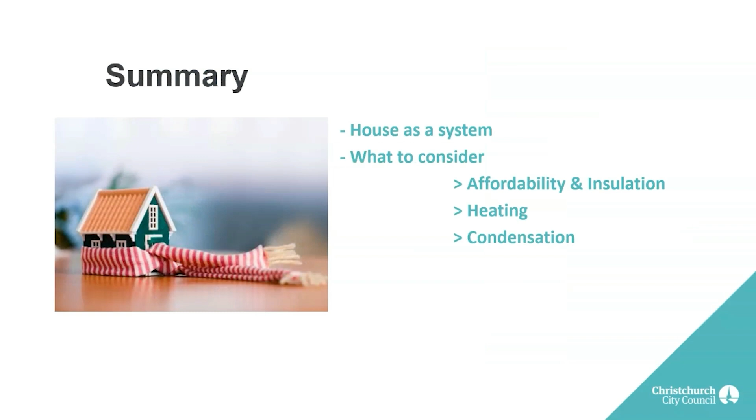Good afternoon, good evening, everyone. Tonight we're going to talk about: cold homes are not a curse, they are by design. People are cold in their homes, and quite often putting a jersey on is just not quite enough. So how are we going to tackle this? We're going to talk about the house as a system, what to consider, affordability, insulation, heating, condensation. We'll have a bit of a practice exercise, and then we'll talk about the future.

All right, still pushing this a little bit. Here we go. Okay, so first of all,

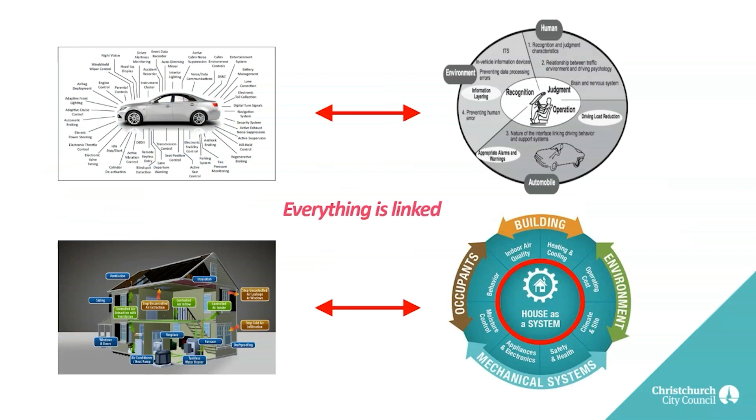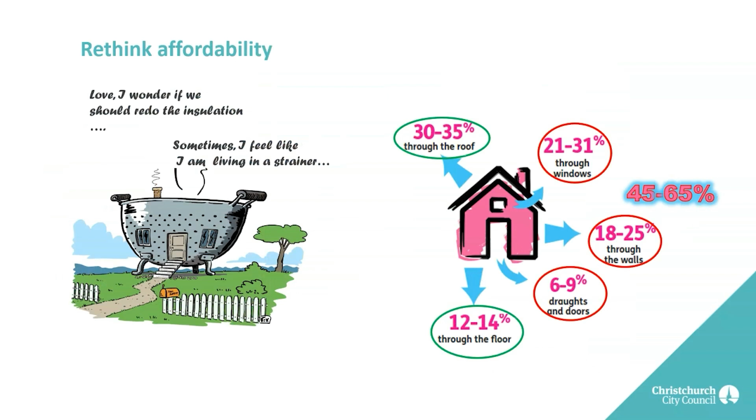In New Zealand, we're really good at insulating the roof and floor because it's easy, but we're pretty crap at dealing with the rest. Simple glazing, no insulation in the walls, and very drafty houses are typical here, and they could be responsible for up to 45-65% of your heat losses. So my question to you tonight is: can you actually afford to lose so much heat?

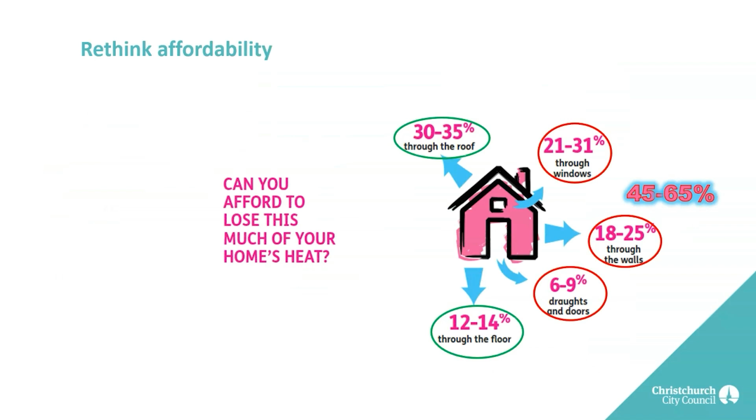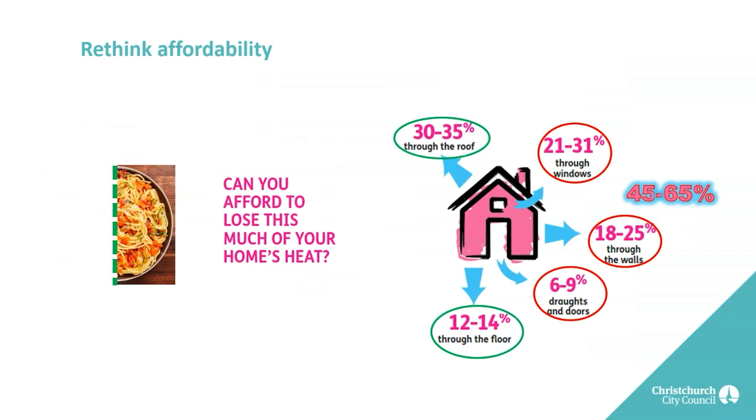So, two examples here to emphasize it. If you cook dinner tonight for your whole family, and before starting dinner you take half of the meal and put it in the bin - is this affordable? Because this is what you do with heating, right? Got it? The second one is even funnier - well, to me.

Imagine it's winter and you just go out with a beanie and some socks, and that's it. You forget about the rest in the middle, right? I'm sure it's going to be freezing, it's going to be chilling. So do not apply to your house what you will not apply to your own body.

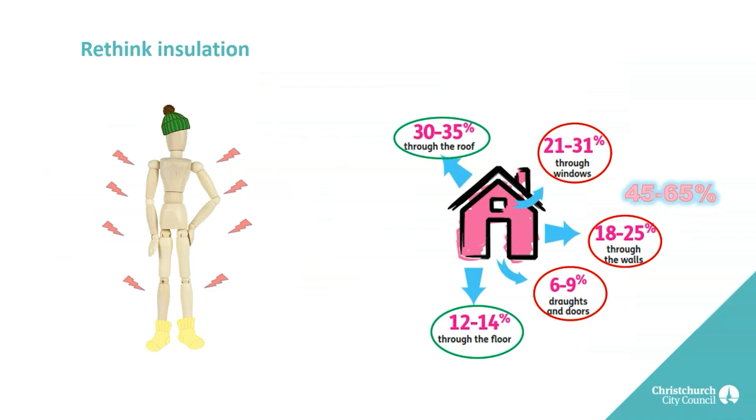So you need clothes, right? So you need a good insulation layer for the whole house. Now, we need clothes to keep the energy in. Very important. So one more thing.

I know you're going to not like it, but insulation by itself won't keep you warm, right? Highly controversial, but this is the truth. So if you buy clothes and don't wear them, like my jacket on the seat there, it's not producing the heat, it's not retaining any heat. So you need to have a source of heating to be able to retain some heat, right? So that's how you stay warm.

So if you've got a bedroom with insulation and no source of heat, well hello, there's nothing to retain. The bedroom is gonna stay cold, right? No source of heat, nothing to retain. So very important to keep that in mind.

Okay, heating basic principles. Just a couple of information about the thermodynamics that apply to buildings. So the first law is about energy, and it says energy is conserved and it could be converted. So energy can't be created and it can't be destroyed, right? So very important. So you can save money, but you can't save energy.

That's bullshit, that's crap, sorry, excuse my French. That's not happening with the law.

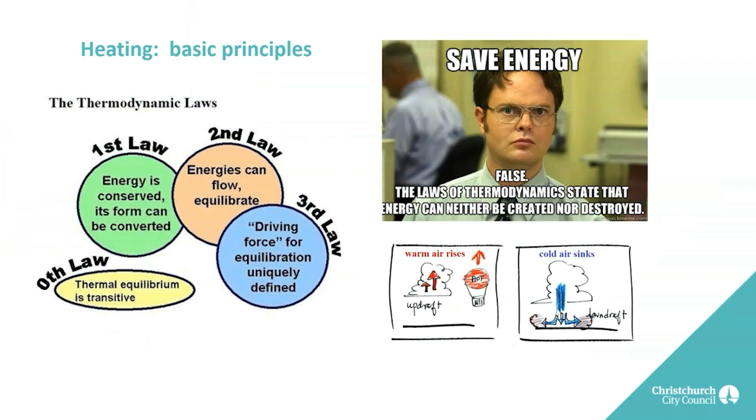The second law of thermodynamics says energy can flow. So heat rises, cold air goes down, and it can also equilibrate. So it always goes one way, always from hot to cold. So if you have someone coming to you and saying, close that window, you let the cold in, that's just not how physics works, man. The heat goes out, that's it. You feel the heat leaving your skin, you feel cold, but this is what it is. The cold never comes in.

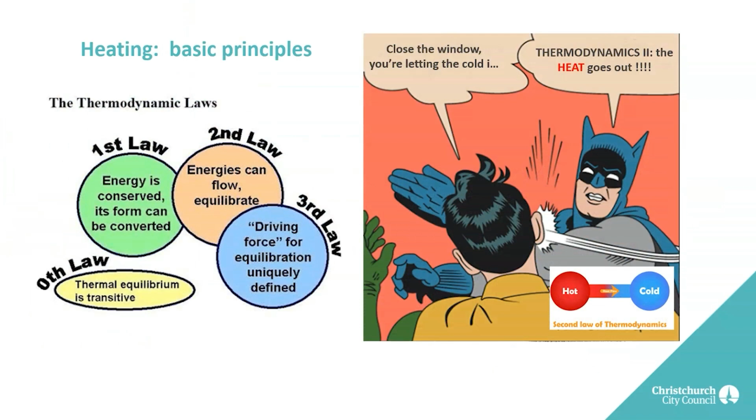Now we have clarified that. Heating - okay, a typical mistake is to start the thinking with product. Just wrong, don't start this way. So when people come to me at the council and they've got a new design and they're like, ooh, I've got a new house, I want underfloor heating.

And I'm like, cool, okay, do you understand you're going to have a concrete floor then? And they're like, yeah, I also want carpet everywhere, especially in the lounge. And I'm like, well, it's not going to work, man. You're putting insulation on top of your heating system. You're going to go against what you want to achieve.

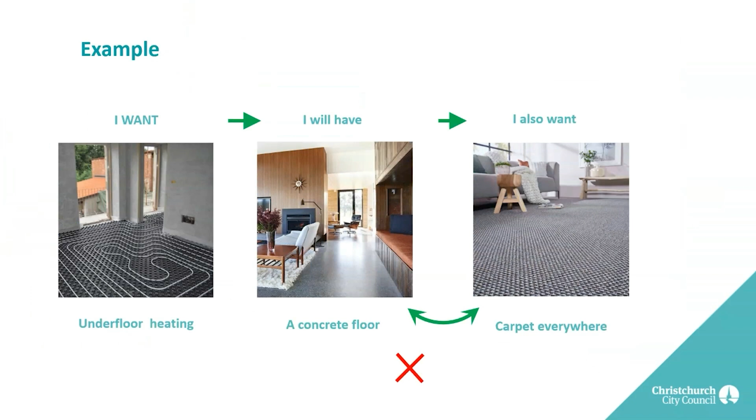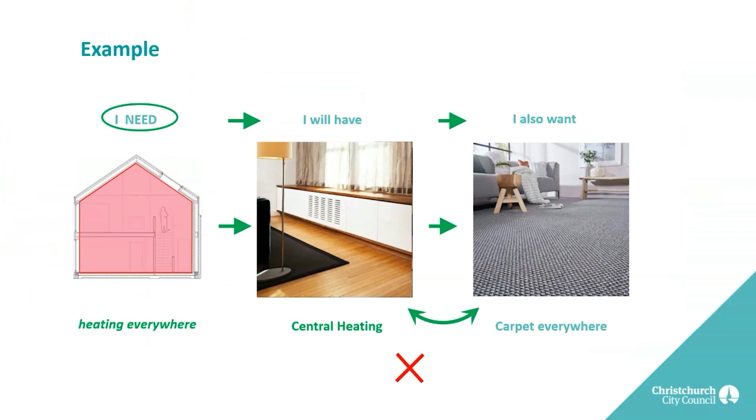So maybe what you're saying is, I want heating everywhere. Heating everywhere? Here you go. And what you're actually looking for is central heating. And here you can have carpet, and this is working, right? So it's very important to understand everything is linked.

So how do we choose the best heating system? It's a 4-step process. The first one is, how does your house retain the heat? The second one is, what type of heat do you prefer? The third one is, how do you want to interact with your heating system? And then you can choose what type of heater is the most adequate for your house.

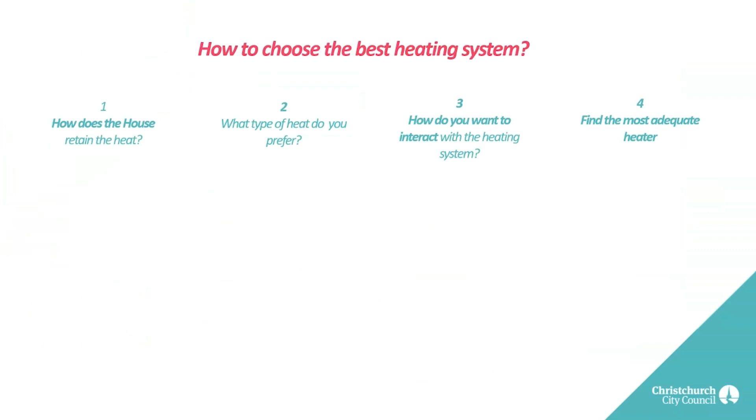So tonight, when you go home, I want you to think about, how does my house retain the heat? There's only 2 answers: thermal mass and air tightness. So either your house is a beautiful old villa and you've got a lot of thermal mass - solid timber wall, solid timber floor, solid panel, concrete, bricks, solid plaster - that's thermal mass, that holds heat. The other option is you've got a more modern house and it's kind of airtight. So that's your way of retaining the heat.

Okay, that's pretty much it. What type of heat do you prefer? Well, there's 2: radiation and convection. So radiation, you heat the surfaces, and it works really well with thermal mass houses.

You've got convection, where you're heating the air, and it works really well with airtight houses. So here you've got a couple of heating solutions. Fireplace, for example, that's radiation, so it works with long infrared waves, and it works really well with thermal mass. Heat pumps, that's a convection system.

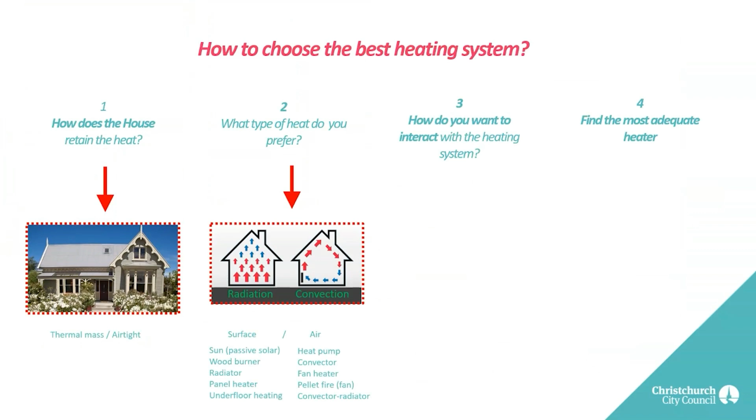How do you want to interact with the system? Two options here. You can be active - you go chop wood, and during the weekend you feed the log burner every 2 hours, you get pretty active there - or you're pretty passive, and it's automatic, you don't have to think about it. End of story. That's pretty much the choice you have.

And then you can choose whatever type of heating works for you, your house, and how you want to interact with it. A couple of examples.

Here's an old villa built in 1905 in Linwood. What we have is large volume, timber windows, very high ceiling. We have thermal mass everywhere - solid timber floor, solid panel wall, timber windows, lath plaster. Here we've got a fireplace that does radiation. It works really well for it. This house has actually had 3 of them.

Now, the problem is in the bedroom, they've got heat pumps. Heat pumps is convection. This house is not airtight at all, so that's a problem. It's not adequate for that type of house.

Option number 2, a modern house built in 2015 in Rolleston. Here, what we have is a very compact house. We've got aluminium windows, and this house is actually pretty airtight, around 3 air exchanges an hour. And we've got a heat pump - works really well. It's heating the air, and the house is airtight.

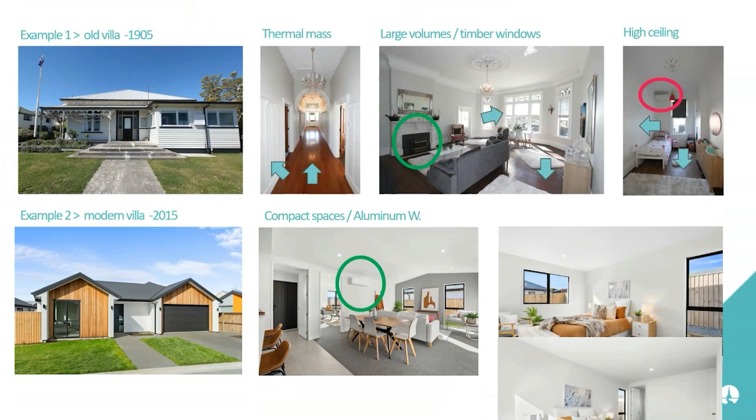Now, here's a picture of the bedroom. There's no heating system in this bedroom, so this is not going to be warm. The insulation is not going to do its job if there is no heating source.

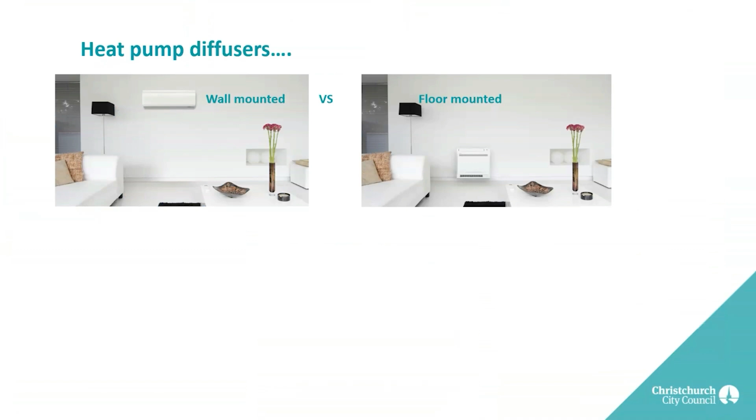So here's a question: heat pump diffusers. There are 2 types - wall-mounted and floor-mounted. You'd think they do the same job, but they don't. A wall-mounted one blows hot air down, and it has to blow really fast to go down, then it rises back up as quick as possible, and you end up with 2 layers - hot air at the top, cold air at the bottom. A floor-mounted one blows hot air at the bottom very slowly, and with natural convection, heat rises, so you heat the whole place slowly but naturally. So one is designed to cool, one is designed to heat.

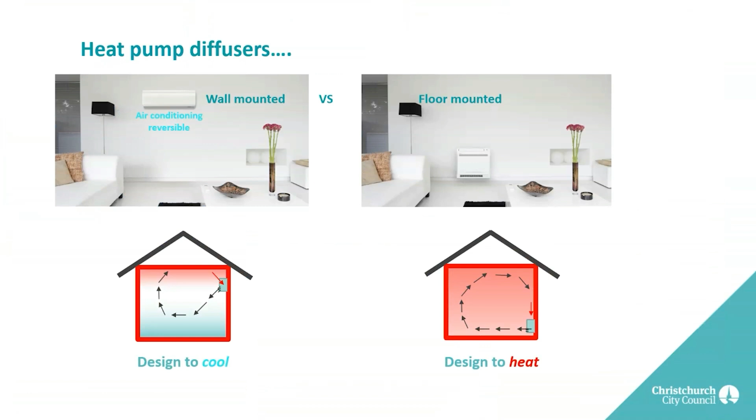So if you've got a wall-mounted unit, you don't have a heat pump, you've got an air conditioning reversible unit. If you don't trust me, look at the spec, you'll see that's what it is - it's not designed to heat, it's first designed to cool. If you've got a floor-mounted one, you're a winner for winter.

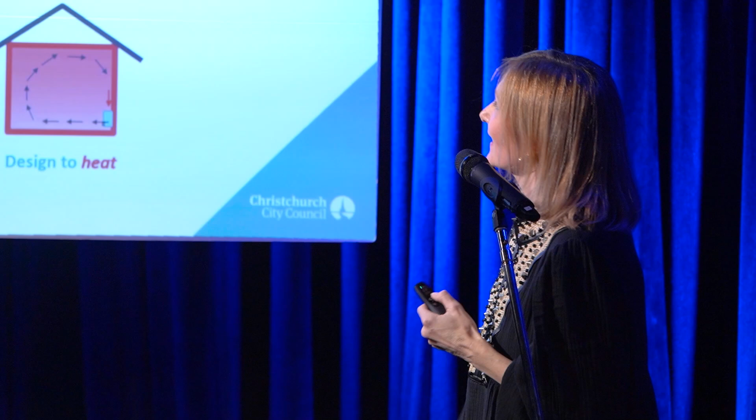Okay, next topic: condensation.

Fun fact - did you know any word in English that finishes by T-I-O-N? That's French, right - la construction, documentation, that's the same, you can name it. There is one exception according to Wikipedia, which is starvation. That's not French - if we don't have food, we still have bread. So that's not from us, that's for sure.

Okay, condensation. It is very hard for me to relate to this because coming from Europe, we don't have that problem - we solved that like 40 years ago. So I had to go back in my memory and think, what is my first memory of condensation? And don't laugh, but this is true - this is my memory of it. You remember at the beginning of the movie, they've got that car being lifted in the Titanic, and then you've got Jack and Rose having fun in the basement. And by the way, that car is actually a French car - this is a true story, thanks to James Cameron. This is a Renault. Very popular at the time, and it was actually in the Titanic.

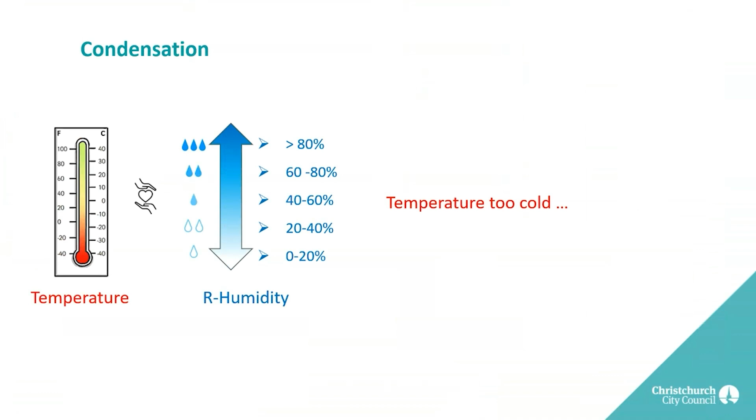So condensation is the relationship between temperature and relative humidity gone wrong. If the temperature is too cold, that's what's happening when you speak outside in winter morning - the air is too cold to hold any moisture, and you see condensation when you speak. And if the humidity is too high, like in the shower, the air will be saturated with moisture and start to condense.

That's a massive problem. Here's a fun fact: 80% of the condensation is human-made in the house. So you are the problem. Well, we are the problem.

We make it, right? A couple per night releases a liter of moisture. If you don't open your windows, after 30 days, that's 30 liters. Of course you're going to have condensation on your windows if you don't open them 3 minutes per day. Drying clothes inside is not magic, guys.

The water doesn't disappear, it just changes form. It becomes vapor in the middle of the night, then it changes form again and becomes liquid, and it gets on your windows. So if you've got condensation in the morning, it's probably related to your clothes from the night before. Watch for what you're doing wrong.

So what we need to do is find the right balance between relative humidity, which we want to lower, and the temperature, which we need to raise a little bit. If you don't know what to do, you can get one of these little devices, a thermometer and hygrometer, which measures temperature and relative humidity. $3 on Trade Me, right?

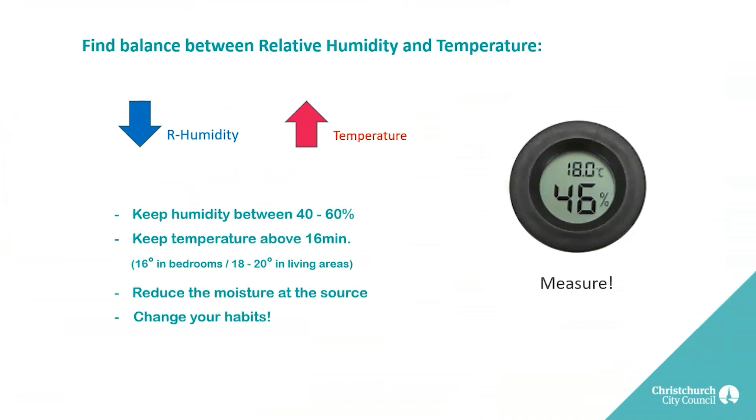Very easy. You want to try to target 40 to 60% relative humidity in your house, temperature above 16, reduce moisture at the source, and have good habits.

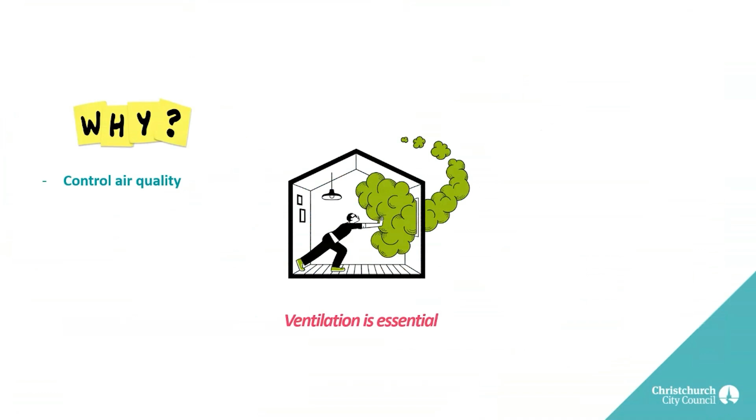Ventilation, I mentioned it, is very important. Why do we need ventilation? Because we want good air quality. We want fresh air for us to breathe. We need to remove the CO2 at night. We need to remove moisture, and we can control overheating.

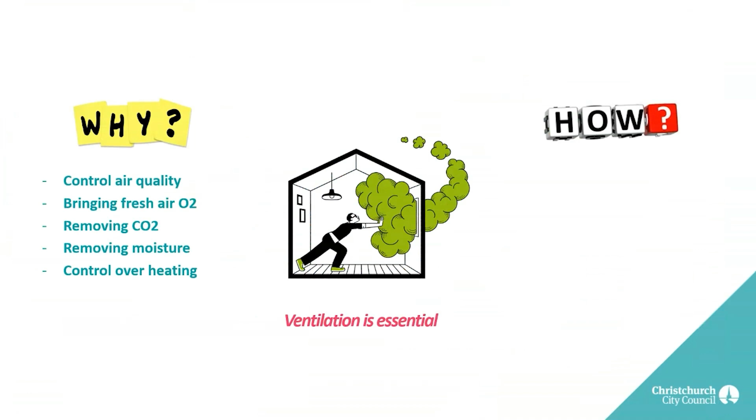How? Well, you can do it naturally by having good habits. Briefly open your windows 3 minutes in the morning. Use the range hood when you're cooking and the extract fan when you're taking a shower. Don't dry clothes inside, or if you do, use a dehumidifier or open a window.

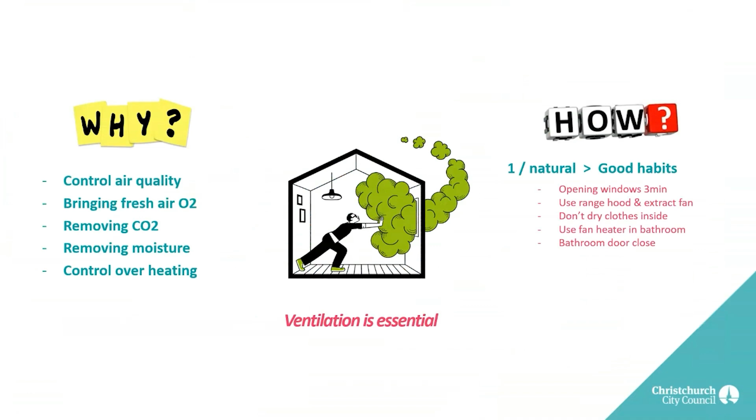Use the fan heater in the bathroom, just to allow the air to hold more moisture before you put the fan on. And keep the bathroom door shut so the extract fan can do its job and the moisture doesn't go into your house. If you don't want to bother with that, you can get a mechanical ventilation system that does it for you - negative pressure, positive pressure, or balanced pressure system.

So it's important to keep the recirculation air off because we don't want to recycle that moisture. We want to get it out, right?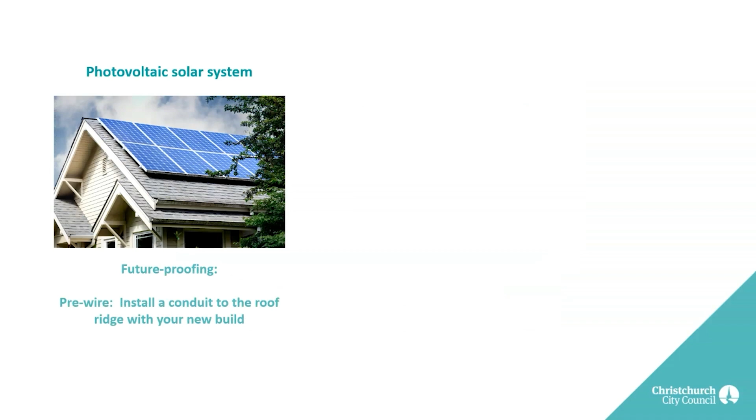So, having said that, guess what? The future is electric. If you're doing a renovation in your house, any work in the roof space, changing your roof or adding insulation, you can future-proof your house. What you need to do is just put an extra cable from the power box to the ridge of the roof. When you've got solar panels, you're solar ready, you just have to plug it in. Very easy, costs $50, that's it.

If you've got your electrician, you might want to have a 50 amp plug in your garage. So the day you buy an electric car, boom, you can plug it in, very easy.

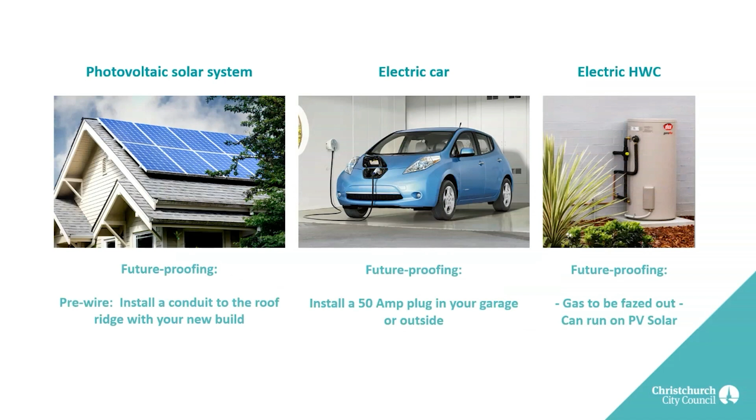And if you have a hot water cylinder, keep it. If you've got gas, it might be time to think about it, because gas is going to get very expensive and it's going to be phased out from next year. You can have hot water directly, free hot water with your solar panels. So think about it, the future is coming and the future is definitely electric.

A little recap to finish. So tonight, I want you to think about affordability and insulation. Ask yourself the right question: is this affordable? I want you to go home and think about how your house retains heat, and whether you have the most adequate heating system in your house.

I want you to think about Jack and Rose and their little problem of condensation, and see if you've got the same, and maybe you can do something about it. Tomorrow morning, I want you to try if you can defrost your car the smart way. And maybe a little bit in the future, if you do renovation, think about how you can future-proof your house. So this is me, thank you.